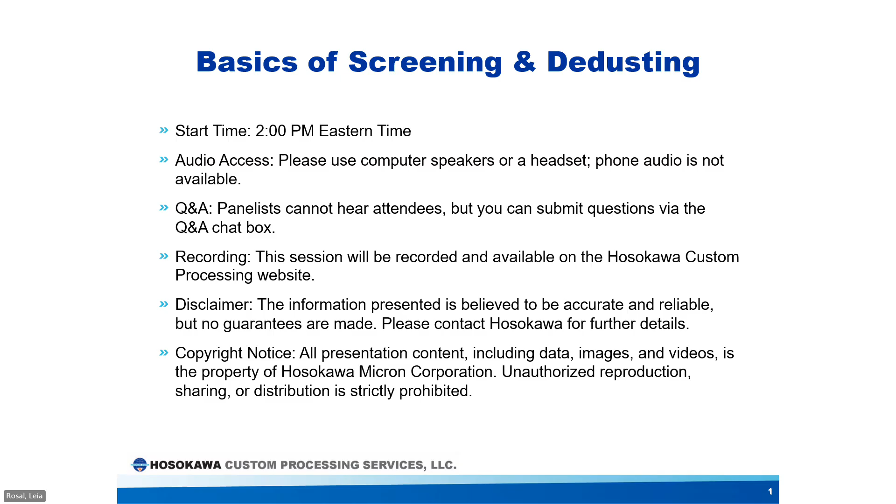Good afternoon, and welcome to our presentation on the processing services offered by Hosokawa Micron. My name is Rob Voorhees, and I will be your presenter today. Today's presentation will be focused on the screening and dedusting services that we can provide. Hosokawa Custom Processing Services made a major investment in a new facility dedicated to providing our customers with state-of-the-art processing services. In 2021, we initiated a search to find a new location for our processing business.

After an extended search throughout several states, we settled on a site in Goldsboro, North Carolina. This is a view of our brand new facility in Goldsboro, which started full-scale processing services in April of 2024. In the presentation, I may refer to the company as HCPS. The new facility is uniquely suited for our processing business. This 50,000 square foot building sits on 19 acres of land in the Park East Industrial Park located in Goldsboro.

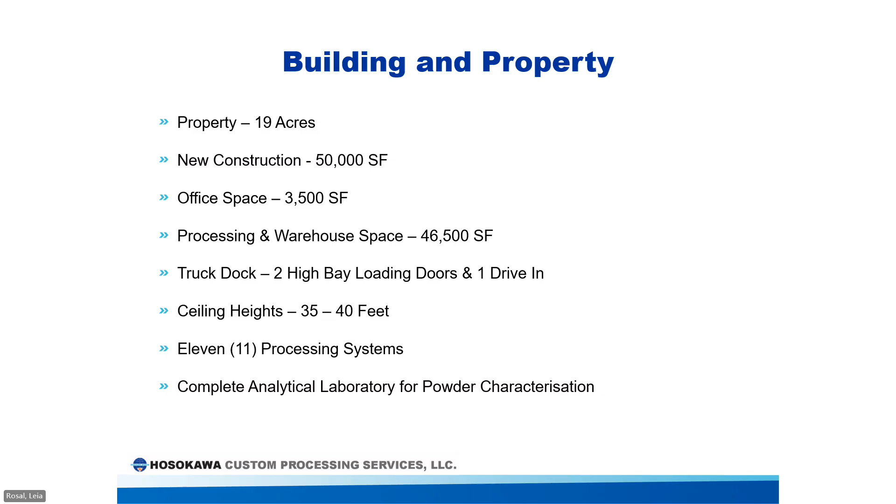We relocated several processing systems from our plant in New Jersey, and we made substantial investments in new equipment to expand our processing capabilities. The major portion of the facility space is dedicated to various processing systems, warehouse space, and future systems installation. We now have 11 installed systems available to our customers for a variety of processing services.

This is a partial view of the processing area at Hosokawa Custom Processing Services. In the foreground are 3 systems for size reduction and micronization. Further in the background are additional systems providing size reduction, blending, and screening operations. A separate area is dedicated to recycling and granulation.

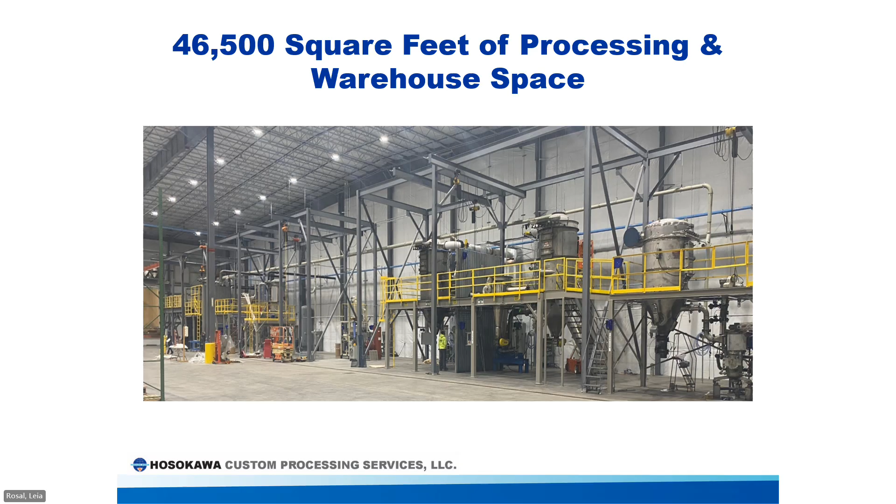Each installed system has its own nuisance dust collection points at various locations to ensure a dust-free and clean processing environment. All systems are designed for processing high KST value materials, and each system is protected by a suppression system designed to prevent dust explosions related to the processing of organic materials or other chemicals that are potential hazards.

The Goldsboro, North Carolina location was chosen for several reasons. However, the most important was the access for our customers. Over the last decade, the southeast sector of the United States has had the largest growth in the country for companies establishing new businesses and manufacturing facilities. In addition, many companies have relocated to the southeast, and in particular North and South Carolina, due to the many benefits and quality of life opportunities these states have to offer. Principal among them is a strong labor force and an overall lower cost to do business.

Hosokawa Custom Processing Services is strategically located in close proximity to the major north-south corridor of Interstate I-95. We are also 1 hour from Raleigh Durham International Airport with access to domestic and international destinations. And the major seaport of Wilmington, North Carolina is 90 miles to the southeast of our Goldsboro location for the importation or export of materials from our international customers.

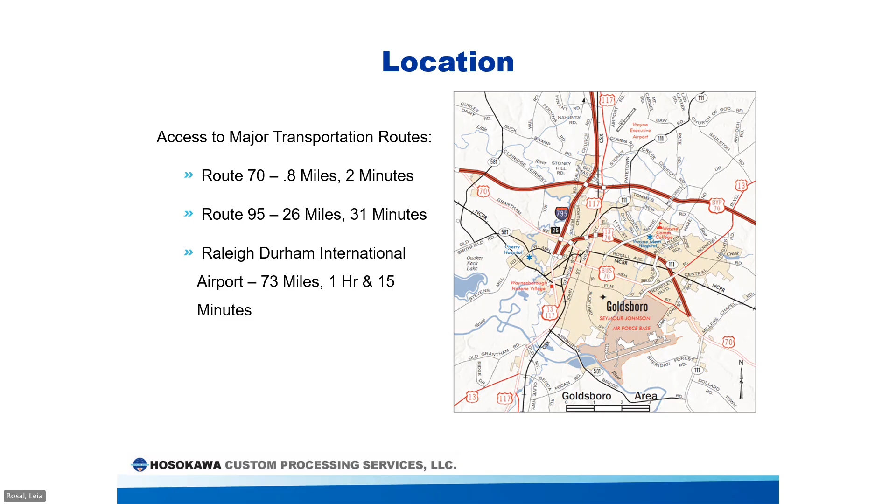HCPS offers a range of services for processing of chemical, mineral, polymer, and plastic materials. The services we offer include several different types of size reduction technologies, screening, mixing, blending, compaction, packaging, particle size analysis, and particle characteristics analysis. We conduct feasibility testing to ensure we can meet the specifications, quality, and quantity of the finished product you require. And when customers are ready to commit to large-scale orders, we then process the materials at our Goldsboro facility.

John McGovern is the manager of the business and has over 35 years of experience in the industry. We have a staff of 14 technicians and 2 maintenance personnel, and we currently operate 2 shifts, 5 and 6 days a week.

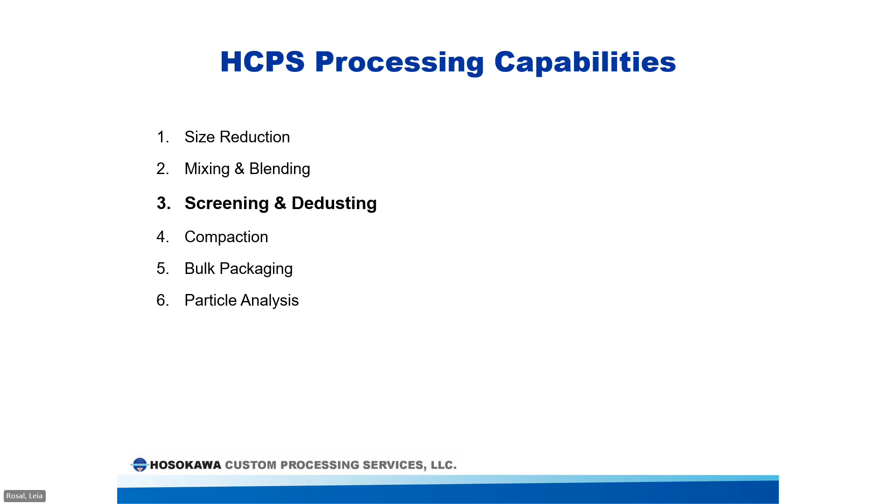Our services are focused on processing materials for the chemical, mineral, and polymer industries. With multiple systems, we have many processing options and the ability to handle materials with many different characteristics. With both pilot scale and large scale systems, we can accommodate all quantities of materials. However, our services offer the best economic efficiency when handling projects in the 10,000 to 100,000 pound range per processing run.

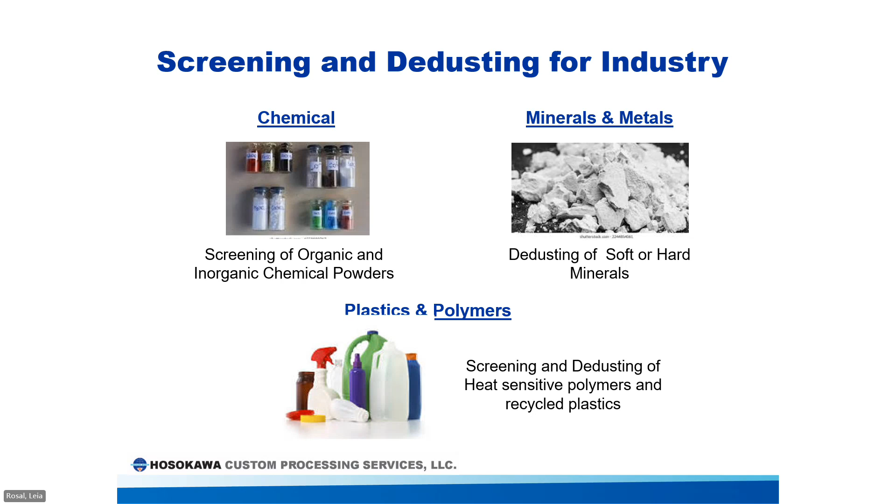For the next half hour or so, we'll cover the basics of dry powder separation by screening and dedusting. We will talk about different types of classifying devices and their application that we can provide at HCPS. And we will look at how screening and dedusting are used as part of a powder processing system.

Separation of materials is not a new concept. Various forms of classification and separation have been in existence for thousands of years. Separation technology has been used to improve product yields and quality. From the early removal of husks and chaff from grains to the separation of heavy metals, man is using basic principles of density, airflow, and mechanical means to accomplish the separation of materials.

Significant developments in equipment and machine design over the last 100 years have allowed for the improvement of separating and classifying of powders. The end result has been to improve the ability to control the desired separation point, or as we call it, the cut point, and to optimize the yields of the coarse and fines fractions. Equally as important is the ability to produce high-quality products on a repetitive basis.

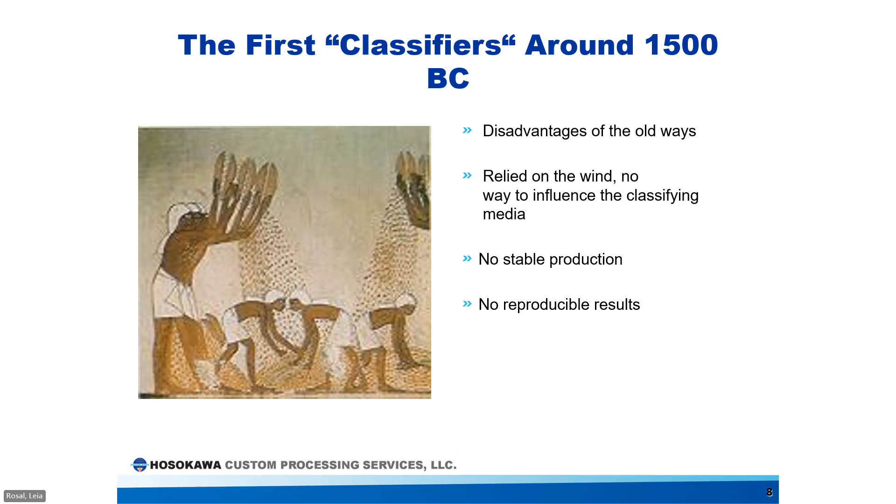Classification is the process of separating or dividing a given material into multiple fractions, quantified by a distinguishable property, the most common property being particle size, where we separate larger particles from smaller particles. Another property would be density, separating heavier particles from lighter ones. Particle shape is yet another property for separation. As an example, separation of spherical particles from plate-like particles. Unfortunately, separation by shape is normally very difficult to accomplish.

Most commonly, the fines fraction is usually the end product and the coarse fraction is discarded, or as an example, the coarse fraction from a milling operation could be returned to a mill for further size reduction. And there are some applications where the end goal is to dedust the product. In this case, the coarse fraction is the end product and the fines are discarded.

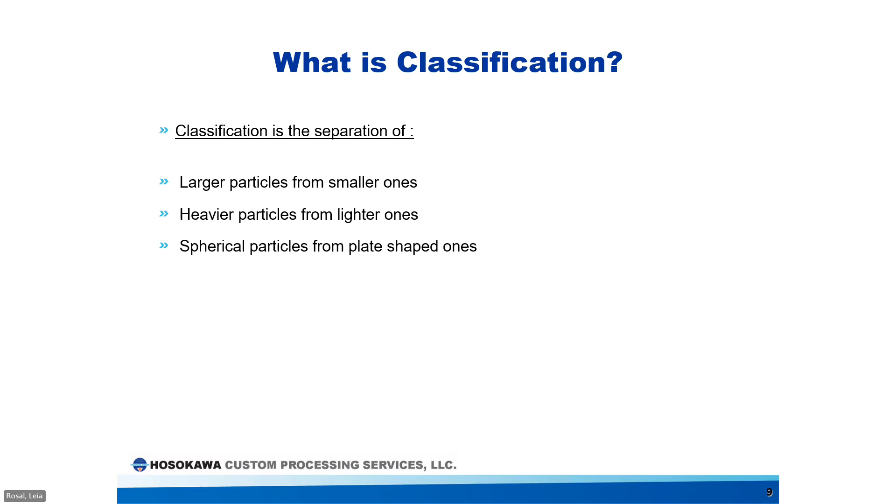There are numerous methods available for classifying dry powders, so we'll begin by categorizing these methods by equipment type. Mechanical sieves can be used in various styles to screen or sieve powders through perforated or woven screen sheets with different opening sizes. Crude separation of powders can also be accomplished with cyclones. This is a good solution when only fine particles are to be removed. Gravity classifiers use gravitational force, weight, to create a force on heavier particles, separating them from lighter particles that are more susceptible to the force created by counter airflow.

Separation by gravity can be accomplished for cut sizes in the 500 micron range up to several millimeters. Above 150 microns or 100 mesh, mechanical screeners are usually the most efficient and cost-effective method for dry powder separation. For cut sizes of 100 microns down to 3 microns, dynamic air classifiers are required. Dynamic classifiers use the centrifugal force developed by a rotating classifier wheel to oppose the centripetal force created by the opposing airflow to separate particles. At the moment, HCPS does not offer dynamic air classification.

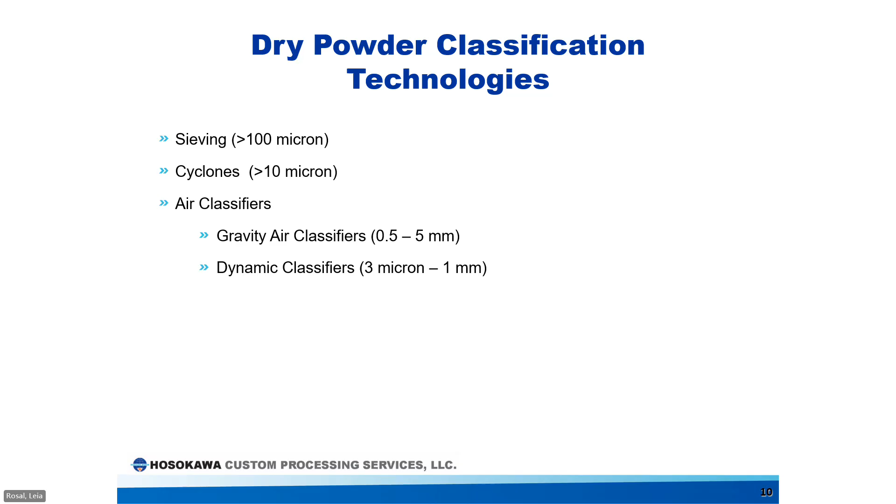These units are particularly suitable to classify free-flowing powders with a low angle of repose. A range of screening motions and amplitudes can be applied to effectively move the material over the screen surface. Depending on the placement of the imbalanced load on the screener, different types of motions can be created. These devices usually can operate with 90 to 95% efficiency, which makes them very attractive options for many applications.

One of the problems associated with this type of classification device can be the blinding of the screens. We can provide screen cleaning devices under the screen to cause additional impact from the bottom to dislodge particles and keep the screens clean and make the screening process more efficient.

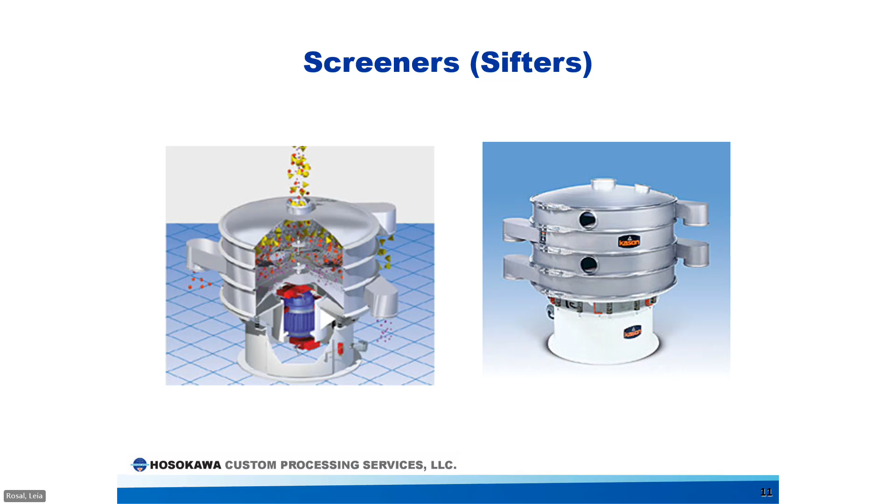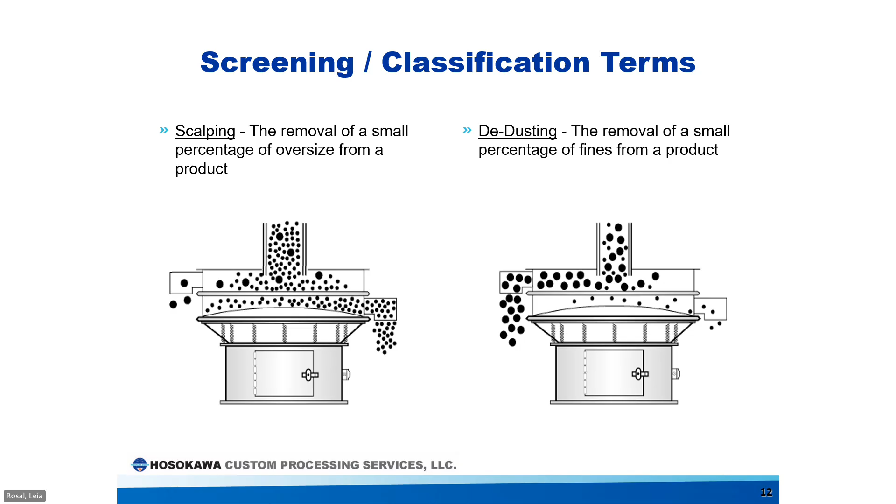There are a couple of terms worth mentioning when discussing screening in general. The first term is scalping. Scalping means the removal of a small percentage of coarse material that could be in the feed material. The second term is dedusting. Dedusting is just the opposite. It means that a small percentage of fine material is the undesired fraction that needs to be removed from the feed material.

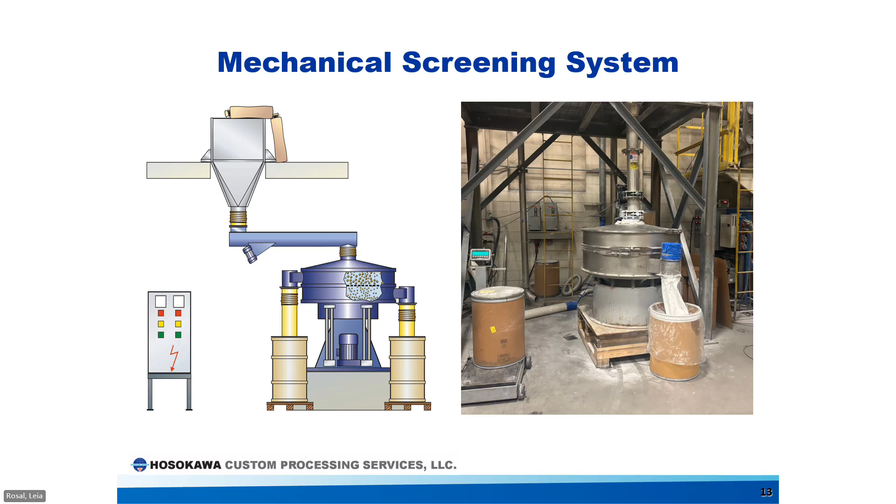The circular airflow movement forces larger particles to the periphery of the housing and then down to the coarse outlet at the bottom of the cyclone. The airflow draws the finer particles inward towards the fines outlet. By varying airflow, air velocity, and cyclone dimensions, cut size and collection efficiency can be maximized to a certain extent.

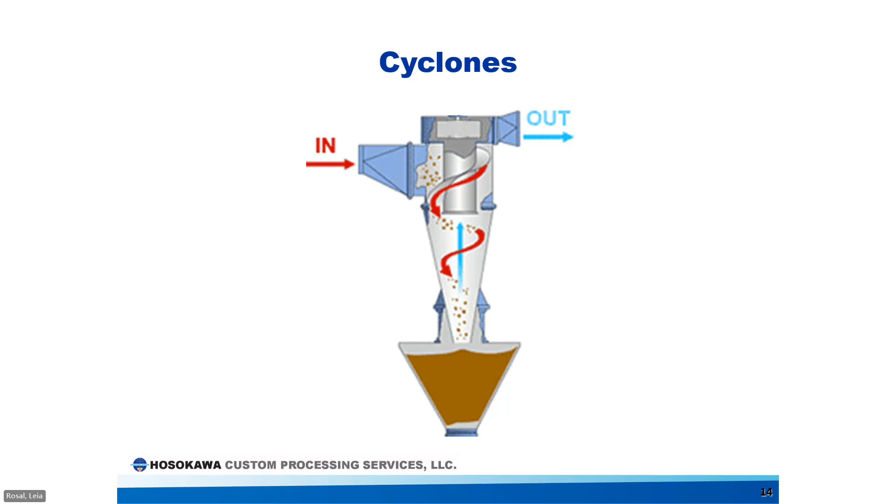These devices are very efficient in collecting particles that are larger than 10 microns. Their efficiency starts falling off as the particle size gets smaller. The major problem with cyclones is their inability to control the cut point. This being a simple device with no moving parts results in it being a very economical solution for some applications. This device can also be used as a primary collection device due to the same beneficial features mentioned earlier.

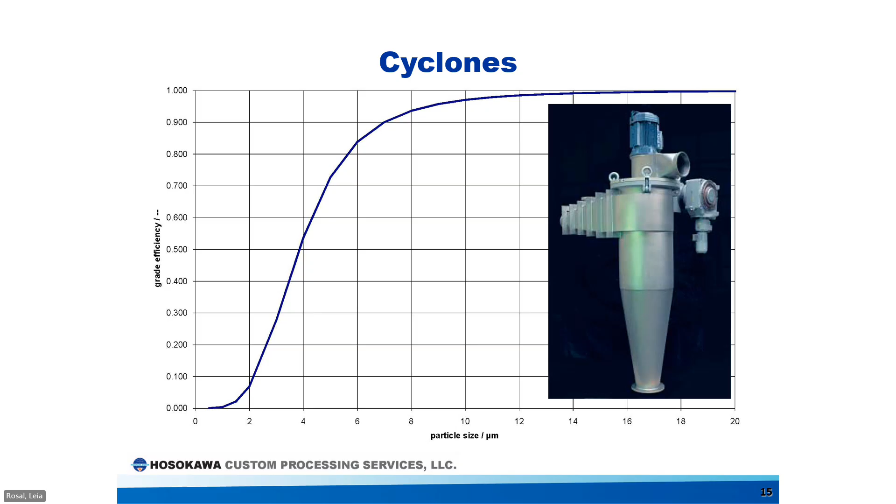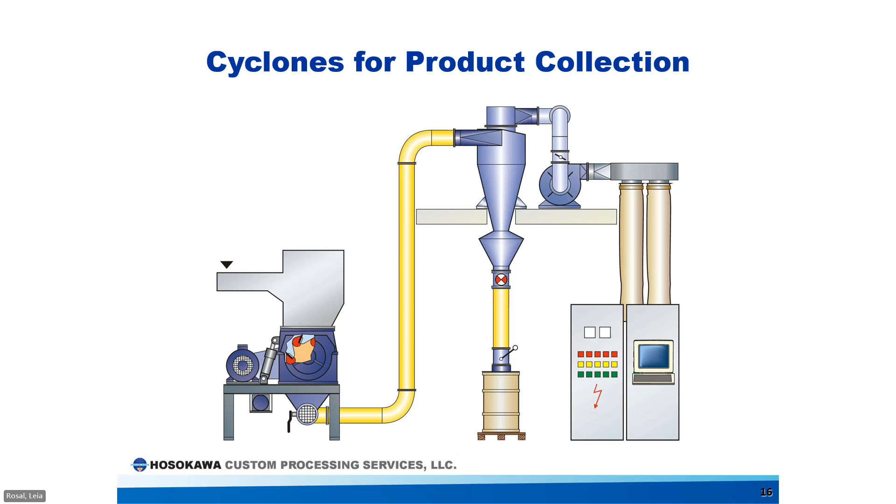These types of milling systems are suitable for grinding a wide range of materials with a Mohs hardness of up to 4. The principal operation of these air classifying mills consists of mechanical impact of material by high-speed rotating hammers. Particles are air conveyed into the mill for size reduction, and the internal classification system retains the particles in the mill until they reach a defined top size, which is determined by the rotational speed of the classifier wheel.

In this case, milled material is then air conveyed to a cyclone where secondary classification takes place. In this system design, the majority of end product material is separated out by the cyclone, and the remaining fines are then collected in a dust collector. In this case, the collection efficiency of the cyclone is very high, eliminating the requirement for the dust collector to be the primary collection device for the fines, as dust loading is very low.

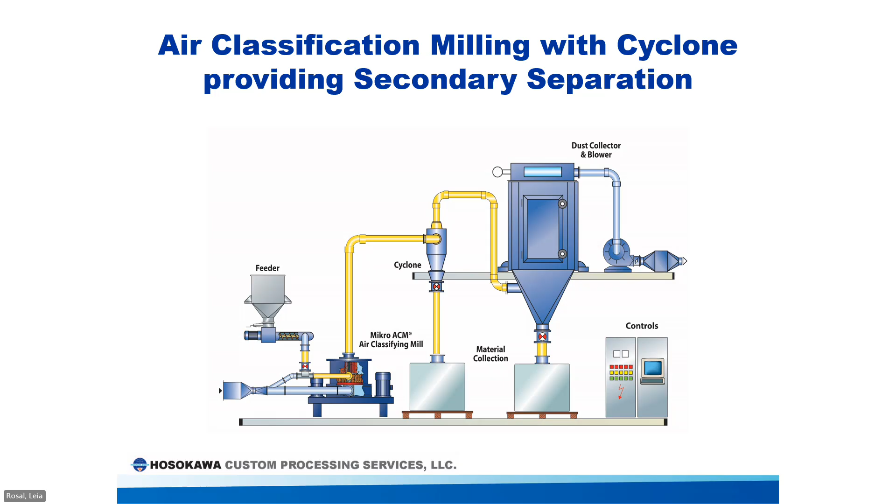The gravity air classifier system shown here is based almost entirely upon the principle of elutriation. It has a zigzag-shaped classifying channel to improve classification. Air enters at the bottom of the classifier, and the feed enters near the top. The air carries the fines upward against gravity and out the top of the classifier, and the coarse particles drop by gravity and exit the bottom of the classifier.

This type of classifier provides gross classification in the size range that can also be accomplished by sieving, but also works for materials that cannot be effectively sieved. This type of system can also be effectively used to dedust products such as plastic granules, fibrous materials, and separation of leaves, sticks, and bark from spices and other dissimilar density materials. These types of classifiers are capable of separations in the 0.3 to 10 millimeter size range.

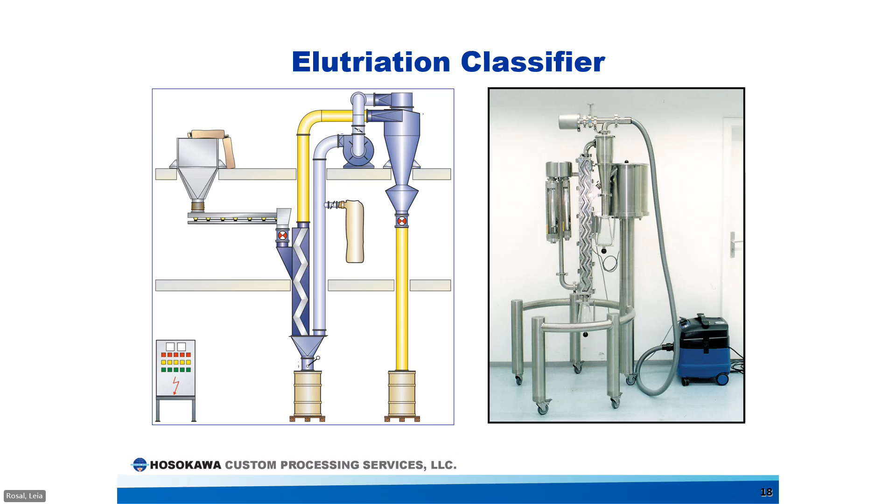Here's a closer look at a classifier that works on the elutriation principle. This type of classifier works well when the requirement is to classify materials based on their difference in bulk density. The internal zigzag profile of an elutriation classifier offers several advantages. The particles that slip down along the walls become caught up again in the upward airflow at every turn of the channel. The zigzag classifier can therefore be regarded as a device with many separation zones. This gives the classifier a high separation efficiency in its operational range.

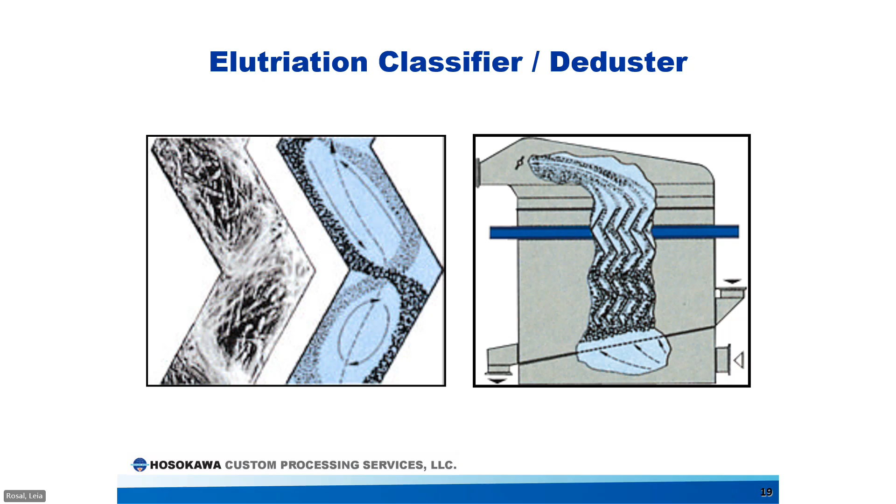The unit pictured here is fed closer to the top of the classifier, and the coarse material gravitates downward against the flow of air, and the fines are conveyed upwards and are collected in a cyclone. The typical load factor for a zigzag classifier is in the range of 1 kilogram of material per 1 kilogram of air.

Installed at our processing facility in North Carolina, we have a complete system for granulation, product collection, and dedusting as shown here. The product to be processed is fed into our 1646 heavy-duty granulator shown on the far right. The granulated product is air conveyed to a cyclone where it is collected and discharged to a deduster located at the discharge of the cyclone. The fines removed by the deduster are air conveyed and collected by a smaller cyclone located at the left of the picture. This system is designed to be a continuous process to produce clean, reground materials.

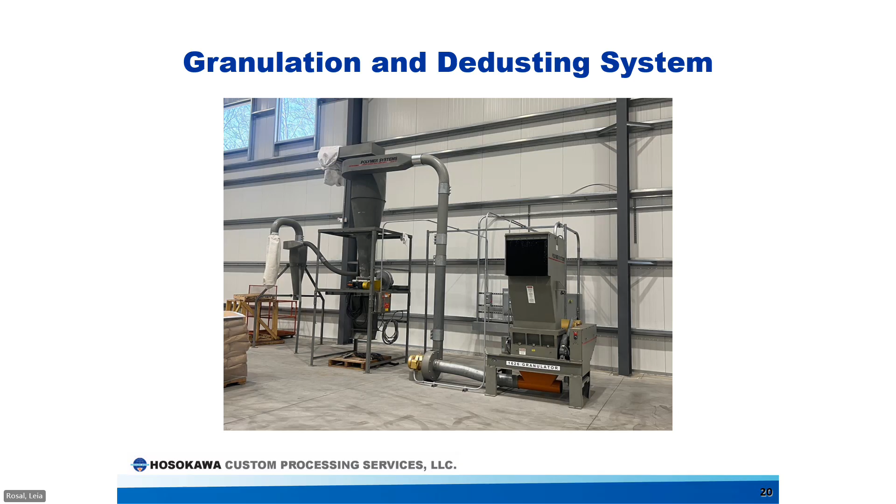Let's take a look at this type of equipment in action. You'll see a granulated plastic material conveyed to a cyclone where it is collected and discharged into a dedusting classifier, where light density paper material is separated from the plastic, leaving a clean reground material that can be recycled. Let's take a look.

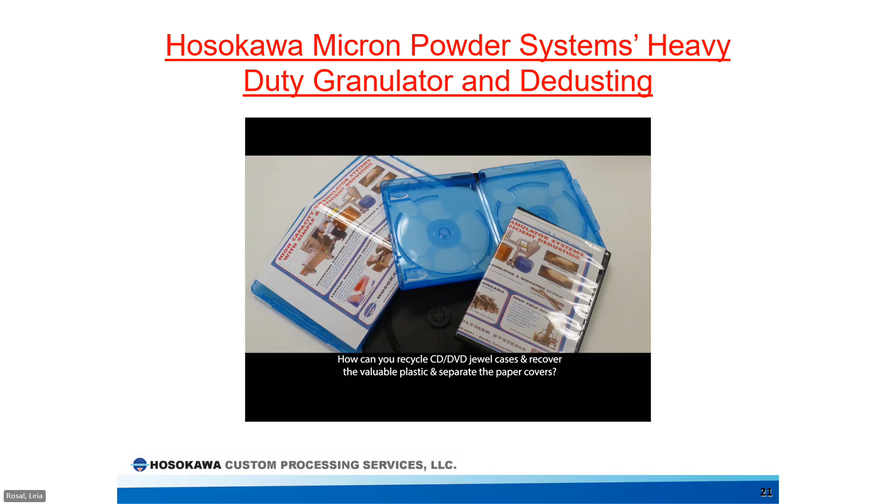This concludes our presentation today on dry powder screening and dedusting. HCP offers screening and dedusting services along with milling systems that can incorporate cyclones for initial product separation and gravity classifiers to address the separation of materials with differences in density or materials that require dedusting. Please feel free to contact us and make it a point to tour our facility in Goldsboro, North Carolina.